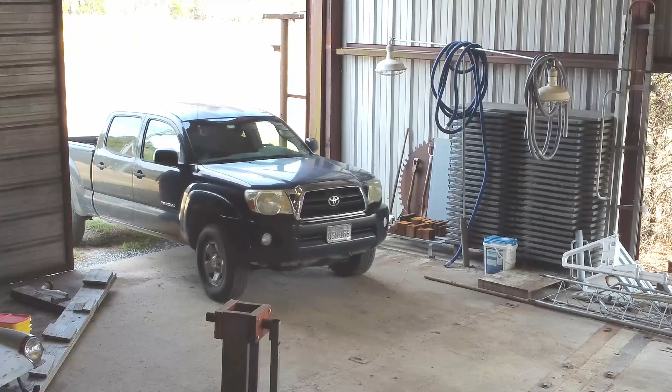So it's after Thanksgiving. It's that time period between Thanksgiving and Christmas that just seems to go by like that, but trying to get done a little bit of this and that in the shop.

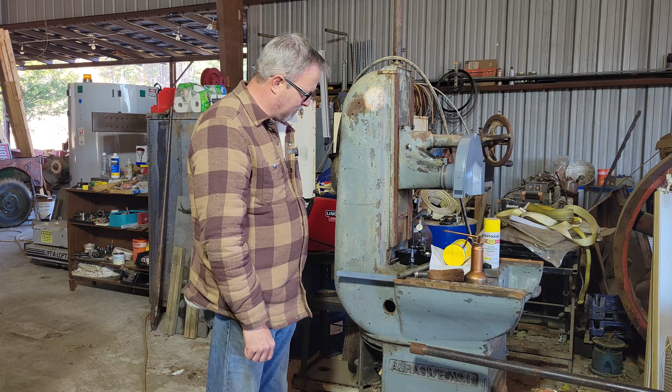Got the Abrasive number 1.5 surface grinder that I've been pecking away at. Any parts that come off of that, I'm going ahead and cleaning and painting. I'm going to start putting together the little gearbox that moves the lower table back and forth. You can see I painted the wheel guard, cleaned that up. So little by little, this thing's coming back together, getting condensation on the steel surfaces.

I don't have a heat light in this. I really need to rig up another heat lamp like I've got in the Cincinnati, and I got two in the K&T to keep the casting warm. And then that way this thing won't sweat when it gets cold.

I don't know how I'm going to do that with the lathe. The lathe is going to be a difficult thing to heat up. I guess I could get something maybe under the headstock foot and get the headstock area heated up on that, but got to do something. I want to protect this as I'm redoing it.

And you can see I got the lift over there with the little yellow light on top, shoehorned in between my inspection table and the compressor. I'm going to start work on getting the vertical lines going up to the ceiling. The determining factor for the elevation of my horizontal conduit run is how many fixed sections of 1-inch Schedule 40 pipe I can get up to make the right angle bend.

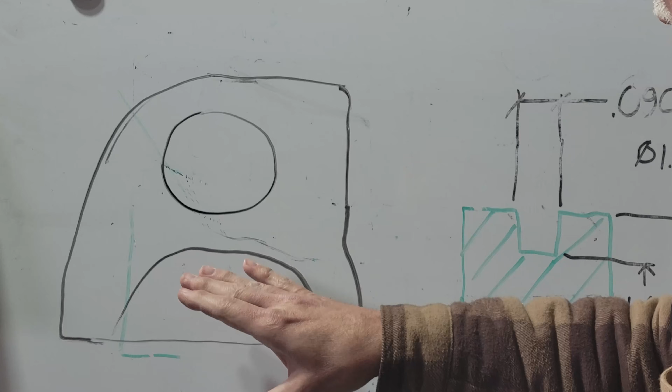I was showing those things on another video, and you can get blinders on from the way things maybe you think are supposed to go together. Two viewers caught something that I didn't, and caused me to go in another direction on getting the quill clamps on that thing. So I'll get a little bit more into that over at the whiteboard. Let's go over and start with that and just kind of filter in other things as I work on them. So I wanted to show you how you can get blinders on when you see one way of doing something and can't visualize another way.

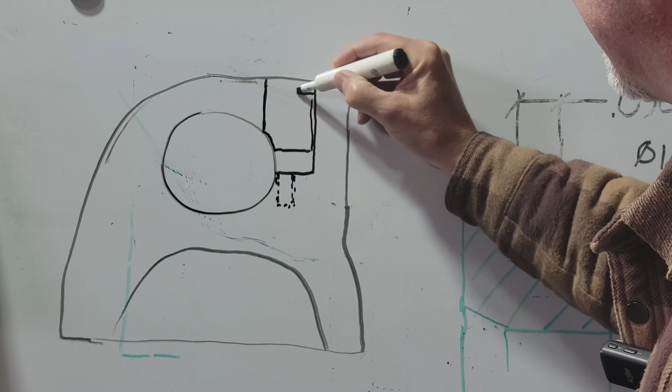This is the tailstock of my Monarch lathe, and it has a 4-inch quill. To lock the quill, it has a bore in the top of this casting that's about 2-inch diameter, and it's a blind hole, and at the bottom of the hole it has a threaded hole, and there's a stud that sticks up, and the plug that goes in this is shaped to fit the scallop of the 4-inch quill. Looks like that. It just has a hole in it.

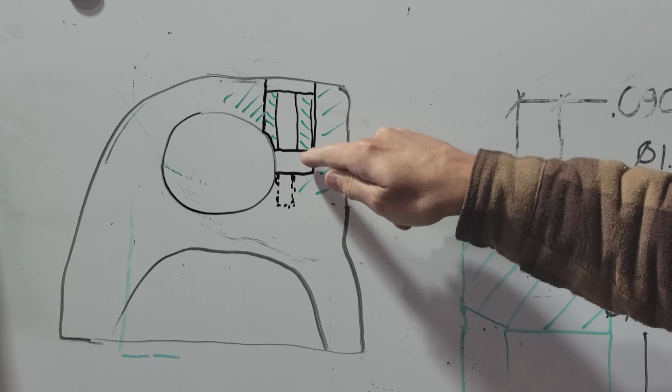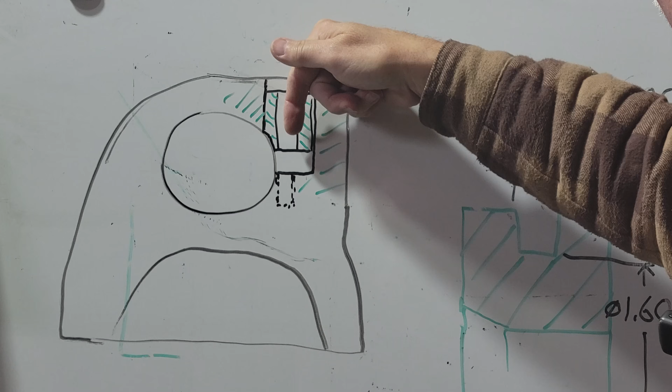Now this thing was really stuck. Let me section this. This plug and the quill were really stuck when I got the lathe. In order to get that plug out, I took out the stud, I packed grease into this cavity and up into here, and then I made a closely fitting piston, a rod, and then I hammered it down. Felt like you're hammering steel on steel. And the pressure spikes created by hammering the grease, which is incompressible, drove this plug up.

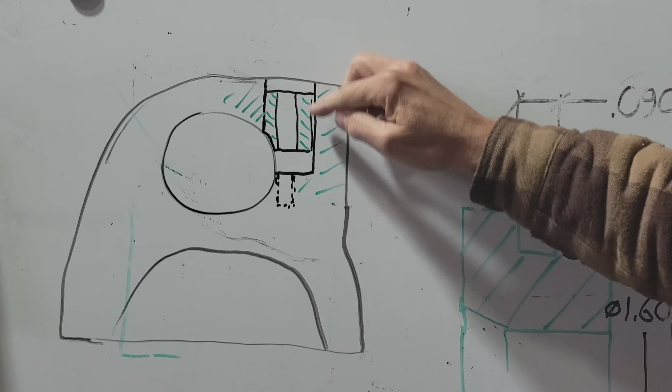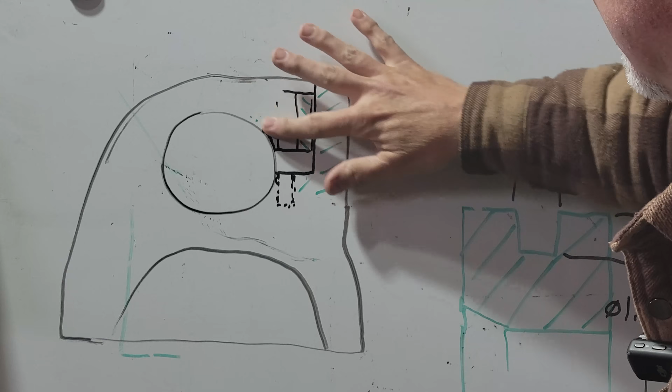And I had to keep adding more grease because the area I was displacing was less than the area pushing on the underside of this plug. But it finally got the plug up to a point where it was exposed, and I could start to wiggle it and turn it. Finally came out. And then I got the quill out. So my thinking this entire time on locking quills into a bore was predicated on how the Monarch was done.

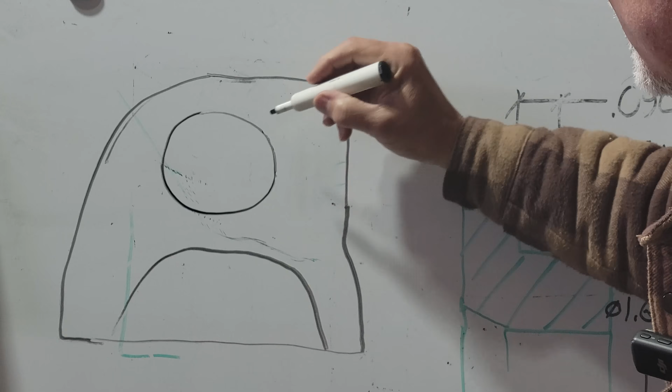So in comes the centers for the Cincinnati Tool and Cutter grinder. Now there you've got like a 1.5-inch diameter quill, and the little plug that locks it is 5/8 diameter. But this passage goes all the way through. And then that plug is in here like this.

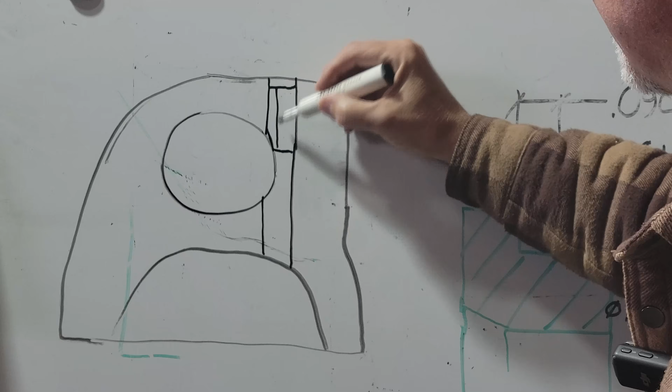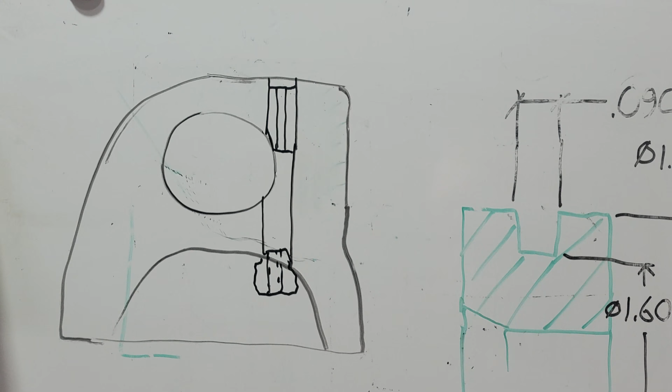Plug actually sits below the surface, and it has a clearance hole inside for a 1/4" screw. Nothing on the underside. And I'm thinking, well, it has to be able to pull up on something, so I imagined I was missing some sort of T-nut that bottomed on the underside of this casting, and the threads were in that T-nut, and that's what I was going to reproduce.

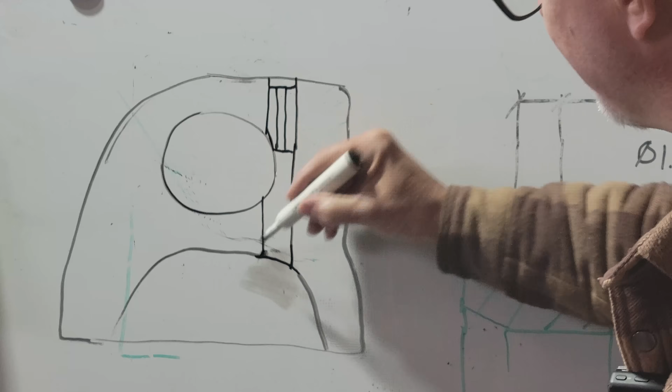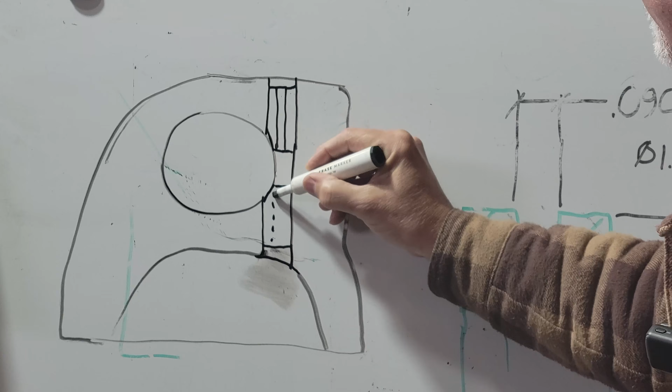But, don't know why that's not erasing nice. Two viewers pointed out something to me, Brian Block and Ed Callahan, and they both said, well, wasn't there possibly another plug on the underside of this that had the threads in it? And this actually pinched the quill from the top and the bottom. And that's when the light bulb goes on. Of course, that's what it is. So I am now going to make this lower plug. Let's go over and show you the material I have to do it.

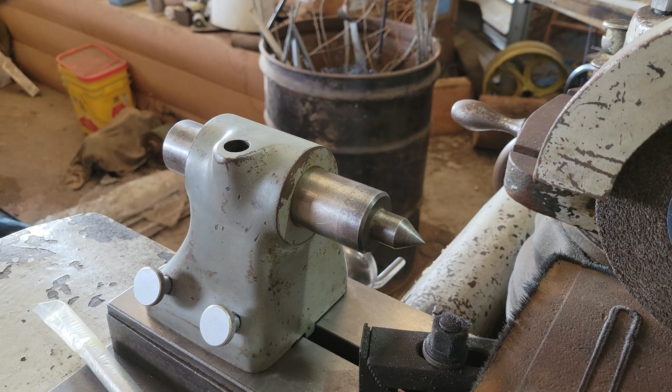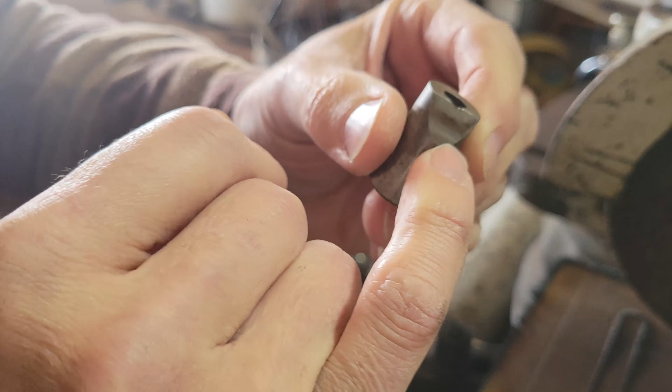And if you get in real close here and look, I don't know if you can see, but it's contacting up here, and there's evidence of line contact along that. Well, what I'm going to do is use the DRO of the tool and cutter grinder, and I'm going to establish the center line of that quill, and establish the center line of these by measuring the inside edge and then using the diameter. That'll give me the relative offset of these two pieces.

I'll model it in CAD, and then for the underside piece, I can do a little bit better than a scallop. I have the perfect machine to make a mating, actually a radius cut that will nest against the side of that quill, and that is the K&T rotary head mill. So let's take some measurements and get set up to machine this drill rod.

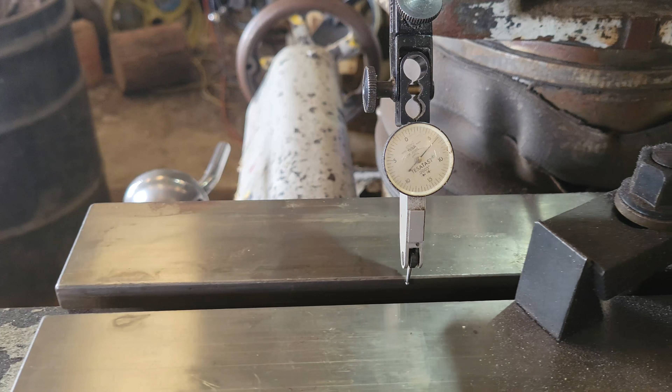I set up the indicator and I trammed this. I had previously zeroed the table over a pretty good distance with the vernier, but I'm reading a little bit of just local undulations here, a couple thousandths back and forth, but it's returning to the same spot each time. So I think because there was a center clamped in this location, I have a little bit of wear right there. And we need to check our starting diameters here. The quill is 1.5 on the nose, about a 1/2 thousandths under. And the stud is 0.625, also a 1/2 thousandths under.

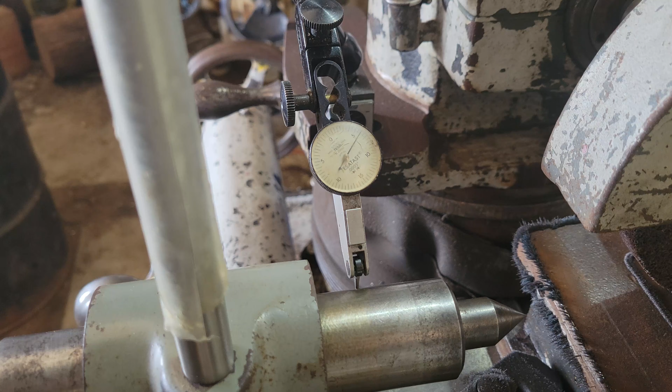So now I need to set up to read the back side of the quill, and with that I'm going to use an indicator and the DRO of the in and out, I guess you'd call it the y-axis travel of the machine. I know at this point the indicator is above center, so I'm going to come in until I touch, and then I'm going to lower the head until I get a high reading. I might have to back off here a little bit. Still climbing, still climbing. There's my high point. Let's get on that high point right there. And we'll turn on the DRO.

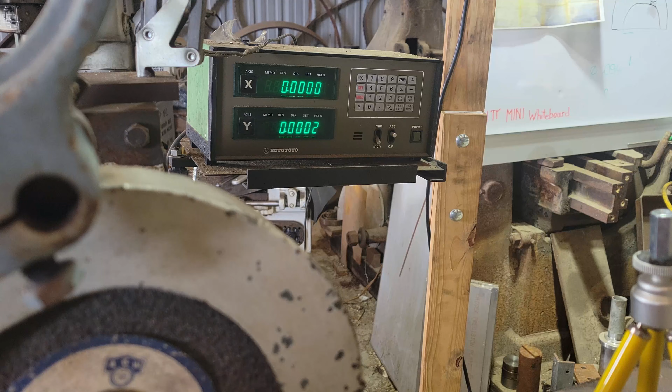As a double check, I'm taking my DRO and I am going to move it, and I'm going to bring the indicator back to 0, which you can't see on camera, and see how close the DRO gets to its 0. Now I'm using a half thousandths resolution indicator and a tenths resolution DRO. So let's see how good I can get. I'm not watching the DRO, I'm just trying to get that needle back on 0. That's it right there. So I'm about 3 tenths off from the DRO. There I'm 2/10. So that's the direction I need to come at it. So let's go ahead and 0 this.

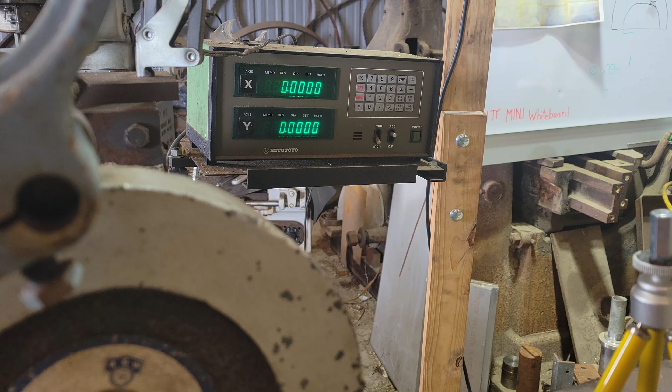Now, without moving the table, what I need to do is to reposition the indicator to be able to read the vertical stem of the quill lock and bring the table back until my indicator reads 0, and that will be the amount of travel that the table did, differences between the two axes. It's not obvious to look at, but basically what I have to have is an orientation of the indicator stem that's going to work both with the horizontal position of the quill and the vertical position of the stem here.

So without moving the table in or out, I'm going to raise the grinding head, which raises the indicator stem. But my 0 position is remembered by this indicator, as long as I don't move it. I need to come up to where the indicator is above the casting. Move this way. Now I need to crank the table in, and I will watch this indicator when this stem touches the back side. There we go. Now roll this back and forth, find the high spot. Right there. And bring it on to 0.

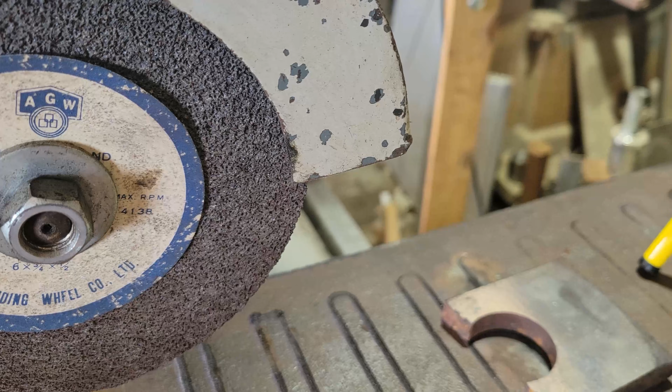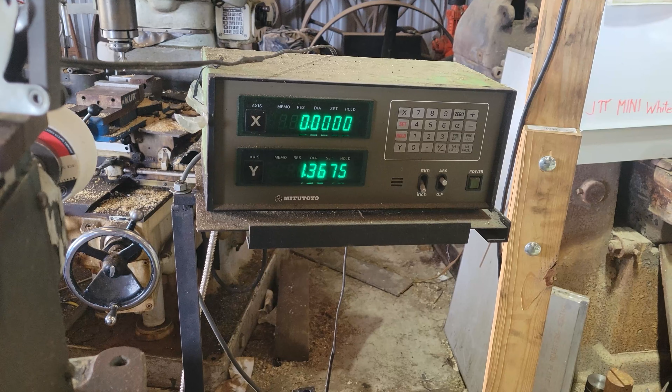Make sure we peak at 0, and we do. And we can see that our DRO is reading 1.3675. So we can take that dimension plus the diameters of the quill and the actual quill stop, and we'll go over to the CAD machine, to SolidWorks, and we'll model that, and then we'll know what the actual geometry of this quill stop is.

I modeled the quill, which is the 1.5" diameter circle here, and the little quill lock, this is the rectangle, and that has a diagonal chop right here, so you can see where it makes contact with the quill, and it stops just above center line. So if I duplicated that geometry with another cylinder and that same diagonal chop, they would never touch, which is what we want.

But like I said before, I can improve on this design by putting an arc in here with the K&T rotary head mill, and then that will nest along that entire surface, and it would serve the same purpose. And to do that, I would have to have an offset of 0.930 from one center to the other, and a vertical height of 0.0723 to place that arc in the same place of where that stops now. But what I'm going to do is I'm going to take the opportunity to change one more thing.

As it is right now, this little quill lock drops below the surface of the actual casting, and that requires that the T-nut up here dip into the bore. And unfortunately, the T-nut is the same diameter. It's 0.625, and it's rough and it's plated, and I would have to take a cut on that T-nut, that thumb wheel, if I were to leave this alone.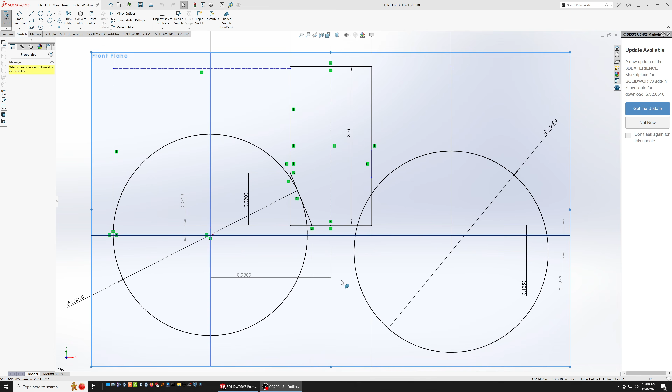Well, let's see how much damage we can do with our new toy. Once I load all my tools in here, not a lot of room to maneuver. Okay, outlet works. Forgot to turn on my light.

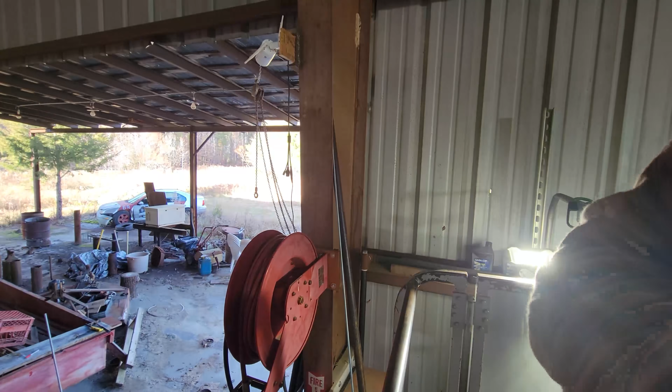Here's a point here where my air line comes up from the compressor, and I made the provision for it to go vertical and also horizontal, although I think we're going to always maintain a doorway there. I need to take this plug out. And I believe my 10-foot piece of black pipe is too long.

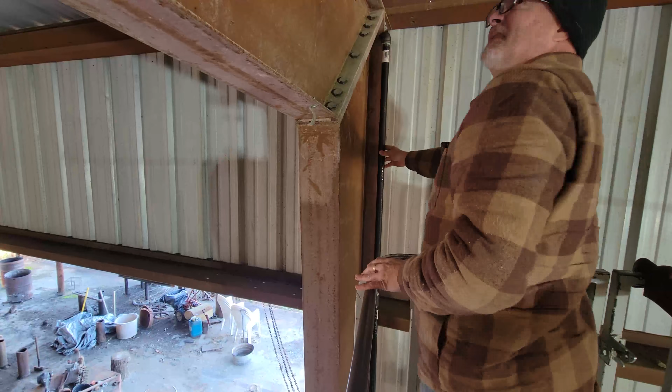Yeah, I'm basically up into the, let me see if I can show you. That basically goes right up into the eave. So I'm going to have to go with a 60-inch and a 48-inch. And then looks like that'll be about perfect. Try to get in just a little closer here. I don't think there's anything in my way if I just go straight.

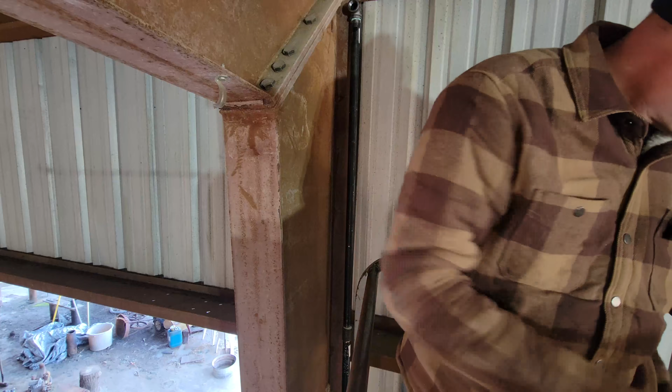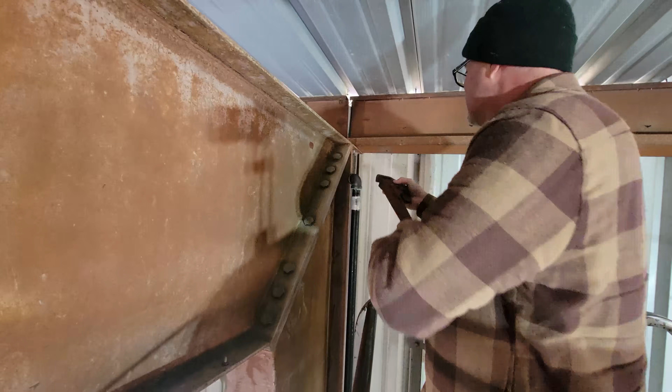Nice thing about pipe joints is you can just start at the top and tighten everything at once. Let's go up a little higher. I think I'm going to get a smaller pipe wrench next time to do the bulk of this tightening. The 24-inch one is heavy. Well, there's about ½ inch of sawdust on this second girt. I think that's reasonably tight.

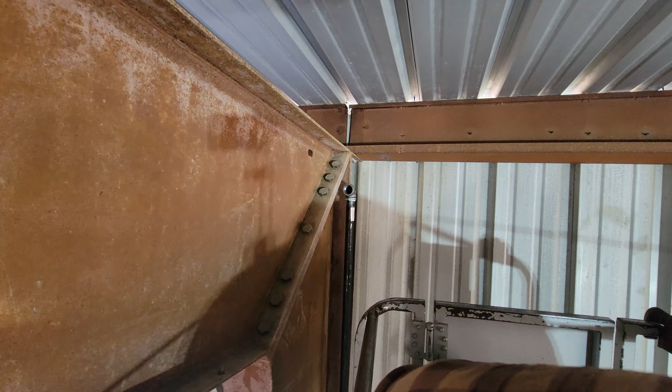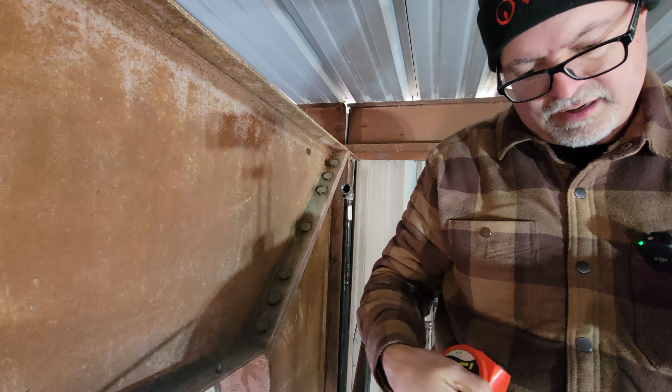We can take a measurement now from the underside of that pipe to the concrete, and we use that measurement as a basis for how long we make the hangers. 199 1/4. So if we go over to this side, I'm going to measure on this purlin up here what the distance to the underside of that purlin is. 210 1/2. So 199 1/4 to 210 1/2. 12-inch hangers ought to do it. And let's go 12 1/2.

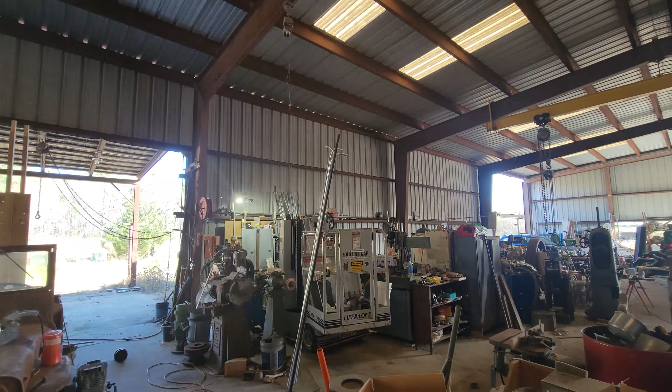Using the air pipe to establish the level of this first member. And then my strategy is going to be get this point level with the upright, the elbow, level it across, and take a measurement from the unistrut to the underside of the purlin. I'm going to go over to the opposite side of the building.

Actually, I'm going to attach a string here first. Go over to the opposite side of the building, put the corresponding other hanger on the far side with the string stretched between them, and then I can just bring the others up to the underside of that string. So hopefully that will work out pretty nicely. I've got to shorten this up just a bit.

Okay, so I've got my 1-inch conduit, which is going to be for the sub panel. It's 3 heavy copper conductors, neutral and ground. Then I've got 2, which I'm going to use as lighting circuits, and one of them is going to end at this next purlin and then go left and right.

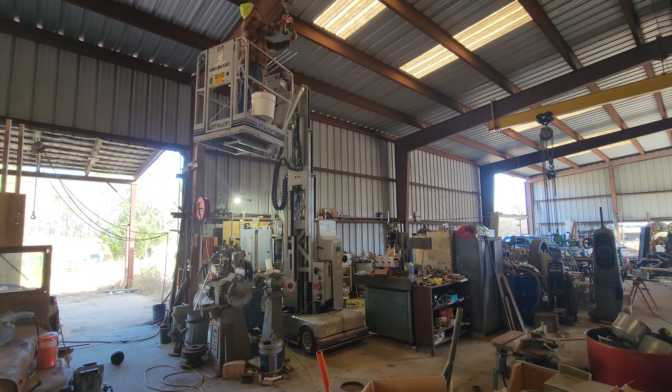I just got to get the down pipes from these down into the switch boxes and to the other panel, and then I can continue working my way across the building. Take this down on one of my trips up here.

I finally found a use for this steel structure in the yard here. I don't know what this was. There is an electrical conduit coming up underground here from inside the building. It was some kind of conveying equipment. There's more foundation here, and it was taken up.

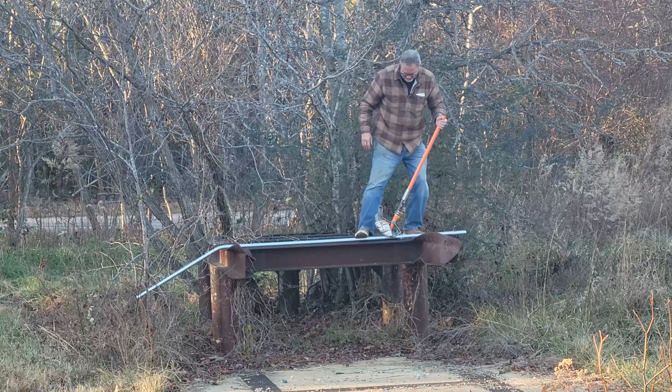But when you're bending conduit, and you're doing a Z-bend, pardon the grace of me getting up here, you always end up with one end of the conduit that is sticking towards the ground. So with this, I can hang that over the edge, and I could complete my Z-bend if I can balance on this thing. That's going to be the second trick.

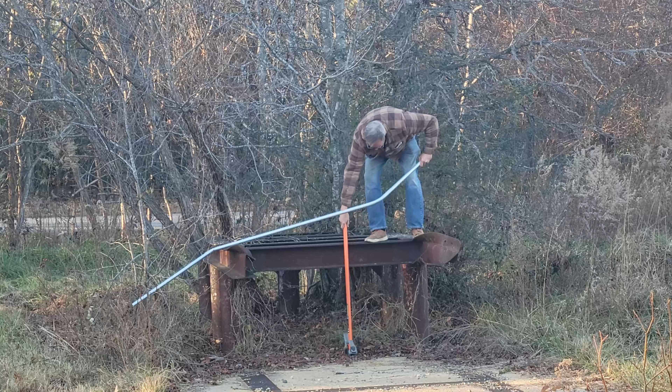And of course I've got to do this in the 1-inch conduit, which is the hardest. Let's just get ready and go for it. Looks reasonable. We'll put it up there and see how we did.

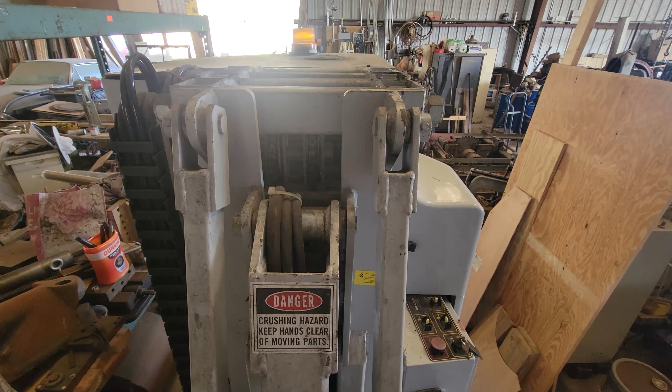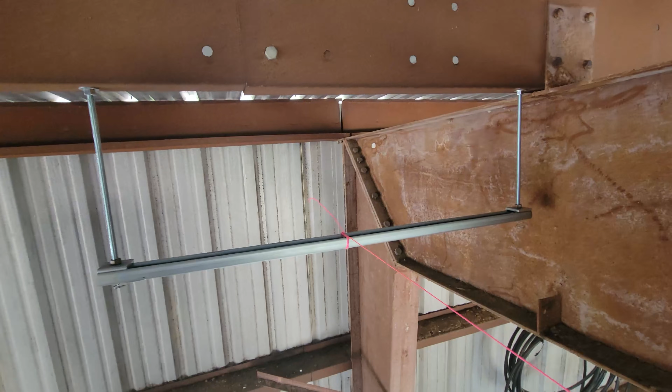Okay, I'm over at the far side of the building, and I have the corresponding hanger done; this is 5 feet from the end of the building. I'm just looking at all of the sawdust and everything that's on top of those girts over there, and I got to get all that off somehow without dropping it on everything below. Fair amount of sawdust here on the bottom of the beam too. That's just holding moisture, no sense in leaving that.

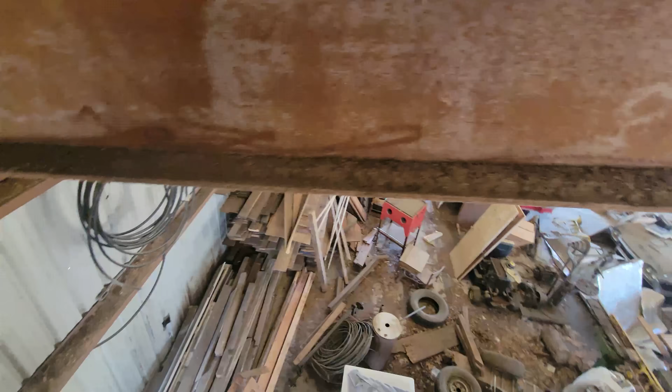So what I did was I strung some mason's twine across, and I don't know if you could see it to sight it, but there's probably, I don't know, 1/4 to a 1/2 inch sag in that, which is about as good as I can get.

But what I'm going to do, starting with this girt here, is measure vertically from the underside of the girt to the string, and do that at 2 more locations across, and then I'll pre-make the hangers and set up the washer stack so that the hangers are the right distance from the end of the threaded rods.

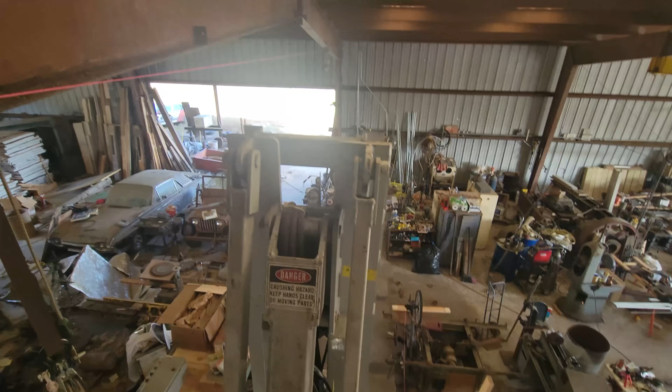That way, as I move the lift back across the shop, I can put those hangers up just touching the underside of the string. Might lift the center of the string up that 1/2 inch or so, but that's how we'll get these 5 hangers across here straight.

Well, I hope you enjoyed that. Gotta admit, I'm absolutely loving my lift. I don't know how I did without it up until this point. Of course, that's what you always say when you get something new and it's a useful tool. So we'll be making a lot of use of it in the next couple weeks, getting this main run, holding 3 conduits to bring power and air over to this side of the building.

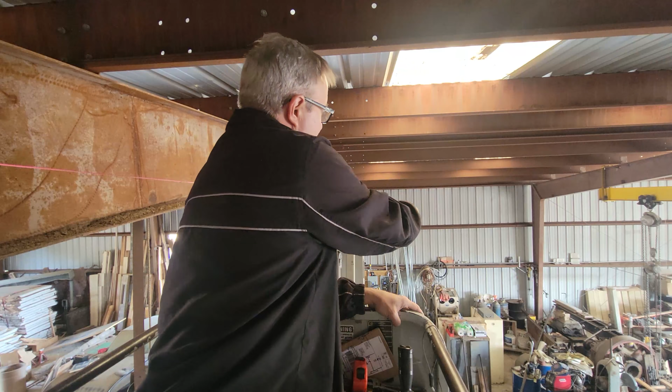And then, I've got 2 lengths here, on this purlin on the ceiling. I'm going to have the overhead panel lights, and those are going to be crossing. In other words, this one will be aimed down at the 3/4 point of the building there. Then on the far side, that'll be aimed down, illuminating this side of the building. I think that'll give a pretty good uniform coverage.

Have 2 panels per bay, and that's the really bright flat panels. I think they're about 20,000 lumens from Amazon each. So once we get 20 of those in this building, it'll be very bright in here. So that's all for Engineer's Workshop.

We'll pick up on the little quill locks next week. Do those up, 'cause now that I've got the geometry laid out in CAD, I'll take care of that on the mill. Should be pretty quick, and continue on the abrasive 1.5 surface grinder.